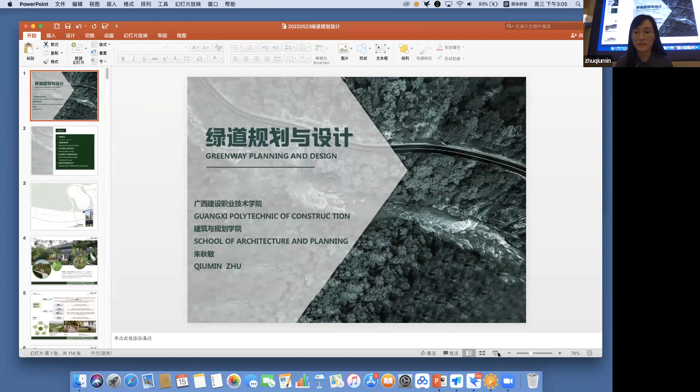Hello, dear ladies and gentlemen. I'm Zhu Qiumin. I'm very engaged in the teaching and scientific research of landscape architecture, and my main courses are urban green space system planning and garden planning and design. The topic of today's course is greenway planning and design.

I will explain the following 5 parts, first of which is the greenway. First, the concept of the greenway, followed by the developments in the history of greenway, then a detailed explanation of greenway planning and design method through 3 cases. First of all, the concept of greenway.

Greenway is a linear green open space, usually around rivers, ridges, scenic roads, and other natural and pedestrian corridors, set up for pedestrians and cyclists to enter the landscape recreation line, connecting major paths, urban green space, natural resources, scenic spots, historical sites, urban and rural residential areas, and large-scale cultural and activity centers.

In short, when you walk in the park, the greenway is at your feet. When you walk around the river, the greenway is at your feet. When you ride your bike down the street to the office, the greenway is under your wheels.

The man-made system includes four parts: slow walking system, traffic connection system, sporting facility system, and signal system. Among them, footpaths, cyclist lanes, and the comprehensive slow system serve the public to carry out daily walks, runs, cycling, as well as sport, recreation, and other activities.

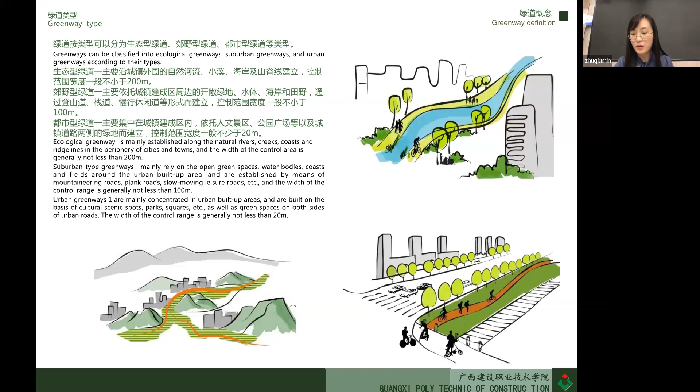Urban greenway refers to built-up areas of the city that rely on the river and the green space on both sides of the road to form a channel for public leisure activities, and its control range is generally no less than 20 meters.

In addition, greenways can be graded according to their level and are generally divided into 3 levels: regional greenway, urban greenway, and community greenway.

Regional greenways connect cities and towns. They have an important impact on the protection of regional ecological green space and the construction of the ecological network system.

Urban greenway may link various types of green open space and important nature and humanities nodes within the administrative area of the city. In actual construction, community greenways are arranged in conjunction with the layout of the urban greenway network.

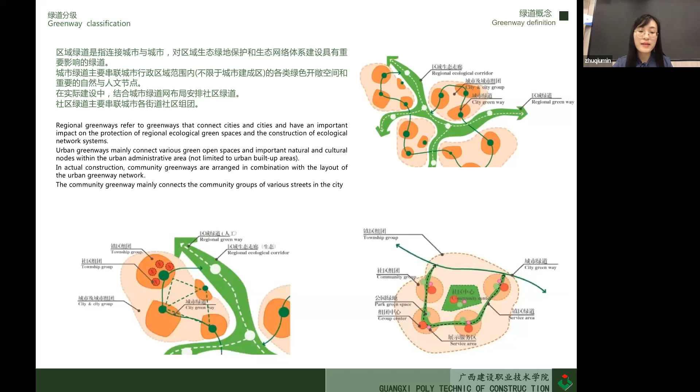Community greenway may ring the city streets and community groups. Next, let's take a look at the evolution of the greenway.

The development of greenway is divided into 4 main stages. The first stage is 1867 to 1960, the early planning stage of the greenway. In this stage, the greenway just began to appear.

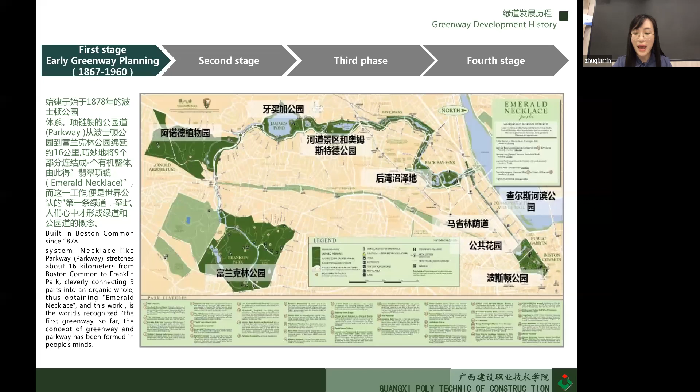It is the Boston Park System's Emerald Necklace, built in 1878. The Emerald Necklace is a parkway that stretches about 16 kilometers from Boston Common to Franklin Park, cleverly linking 9 parts into an organic whole. That's the name Emerald Necklace, and it is recognized as the first greenway. This is how the concepts of greenway and parkway were formed in people's minds.

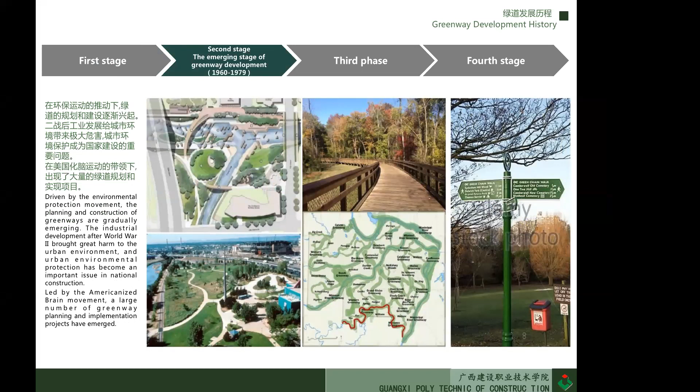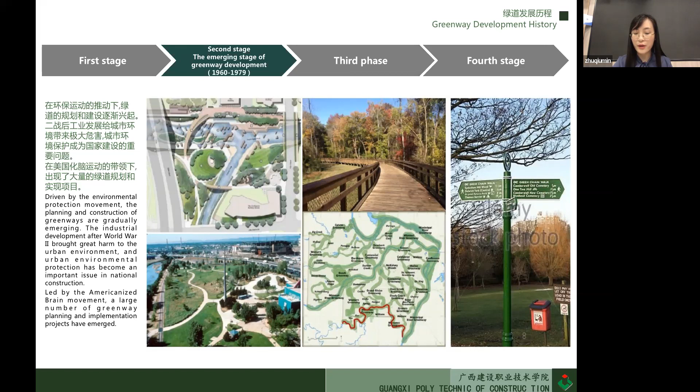The second stage was from 1960 to 1979, which was the emerging greenway development. During this period, the planning and construction of greenway gradually emerged under the impetus of the environmental protection movement. After World War II, industrial development brought harm to the urban environment. Urban environmental protection became an important issue for national construction. Under the leadership of the American Greenway Movement, a large number of greenway projects were planned and implemented.

The third stage is 1980 to 1999, which is the stage of diversified development of greenways. During this period, greenway planning was mainly carried out in developed countries, and the features and functions tended to diversify into a variety of forms of greenway, such as scenic paths, biological corridors, pedestrian paths, and bicycle paths.

Scenic paths are specially designed for the public and tourists to watch and play, while biological corridors are set up for the reproduction of various organisms, which is important to protect biological habitats and provide an environmental basis for protection.

Pedestrian paths and bicycle paths were built to meet the safe passage of human beings. In the current social environment, where people pay more and more attention to healthy living and recreation pursuits, such greenways are particularly important.

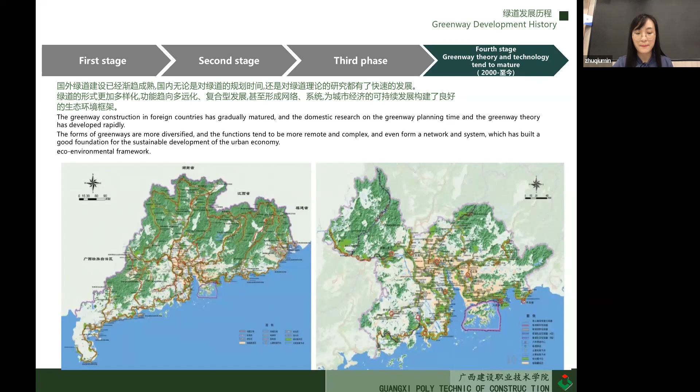In the entire history of greenway planning and construction, there are two distinctive greenways I would like to share with you: the Boston Park system, known as the Emerald Necklace, and the Marina Bay Greenway in Singapore. The first is the Boston Park system, a 16 kilometer system planned and built more than 100 years ago, recognized as the world's first true greenway, linking several city parks together.

Nowadays, this greenway is far away from the hustle and bustle of the city, with its tranquil, idyllic nature, and has become a way of life for Bostonians to walk, talk, and relax on the greenway.

Construction of the entire park system began in 1878 and continued for 16 years, bringing together Boston Common, Public Garden, Commonwealth Avenue Mall, the Riverway, Franklin Park, and other major parks and green space systems, linking together the scenic 16 kilometer park and greenway landscape.

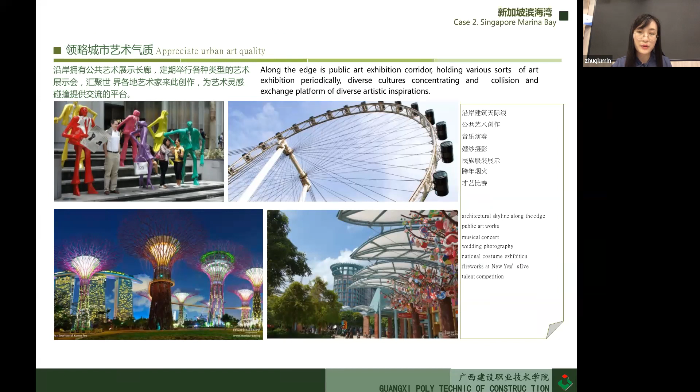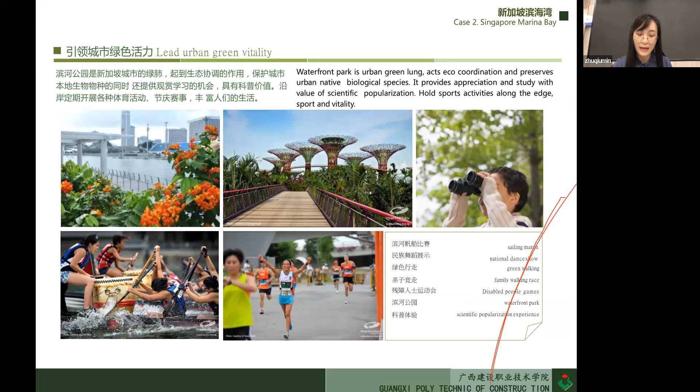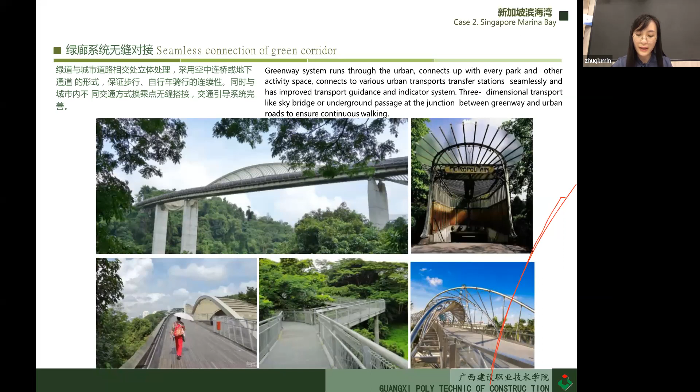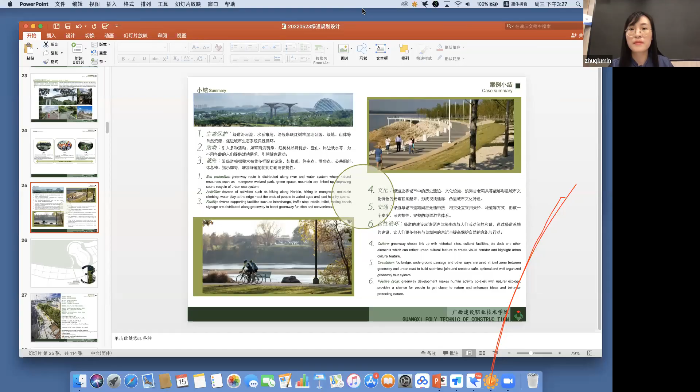Diverse supporting facilities such as interchange, traffic stop, retail, toilets, resting benches. For culture, the Greenway shall link historical sites or cultural facilities, old docks and other elements which can reflect urban cultural features, to create a visual corridor and highlight urban cultural features.

Circulation: footbridges, underground passages, and other ways are used at the junction zone between the Greenway and urban roads to build seamless junctions and create a safe, optional, and well-organized Greenway tour system.

Positive cycle: Greenway development may let human activity coexist with natural ecology, providing a chance for people to get close to nature and enhance ideas and behavior for protecting nature.

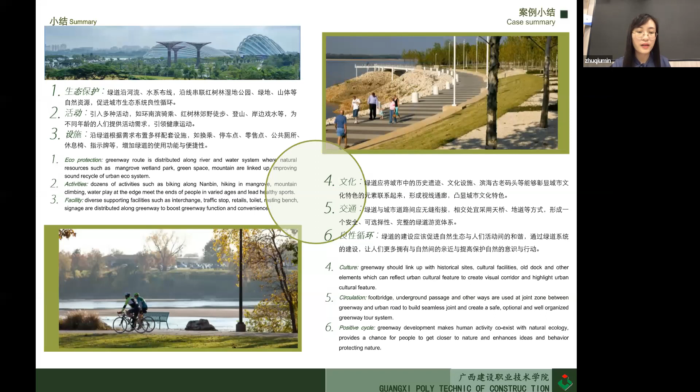Next, I will explain Greenway planning and design, especially through the New York High Line Park. Prior to the construction of the High Line, accidents

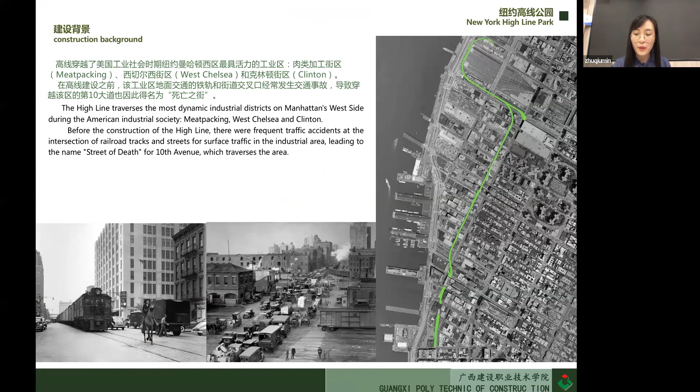occurred at the intersection of the tracks and the street, with surface traffic at grade, leading to the name 'Death Avenue' for 10th Avenue, which runs through the district.

In 1934, with the completion of the elevated railroad tracks, the area was quickly transformed into an industry and freight hub, with former residents moving back and the government beginning to reshape the appearance of the area.

In the 1950s, with the rapid growth of interstate highways and road transportation, train transportation declined, which also affected the capacity of the High Line.

In the 1960s, the southernmost portion of the High Line was destroyed.

In 1980, the High Line ended with the arrival of the last trucks carrying frozen turkeys.

Since then, the High Line has been a subject of controversy over whether to demolish it or not.

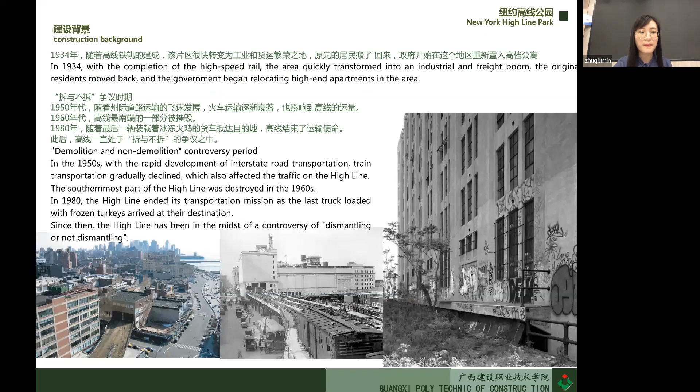This is the introduction, and this is the Gansevoort Plaza. A major access point occupies the corner of Gansevoort and Washington Streets, complemented by the street-level public plaza and the high-level Gansevoort Overlook.

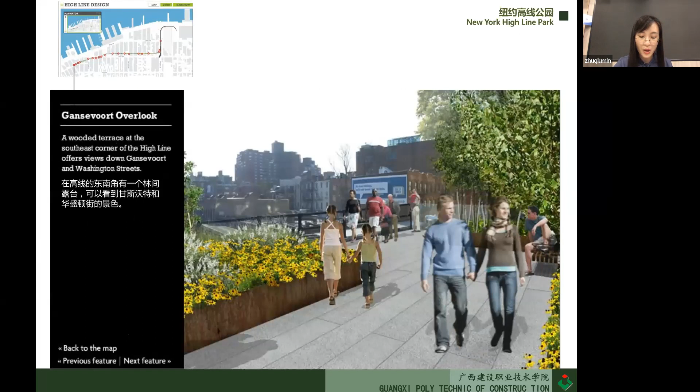This is the Gansevoort Overlook, a wooded terrace at the southeastern corner of the High Line offering views down Gansevoort and Washington Street.

This is the Gansevoort Stair. At the top of the Gansevoort Stair, the Gansevoort Woodland provides dense planting and trees at the edge of the High Line, welcoming visitors into a dark thicket-like setting.

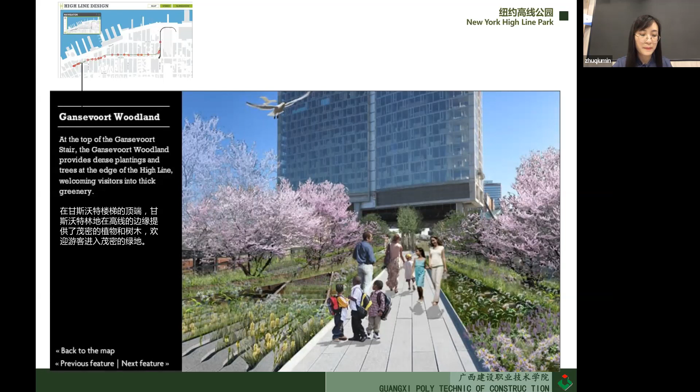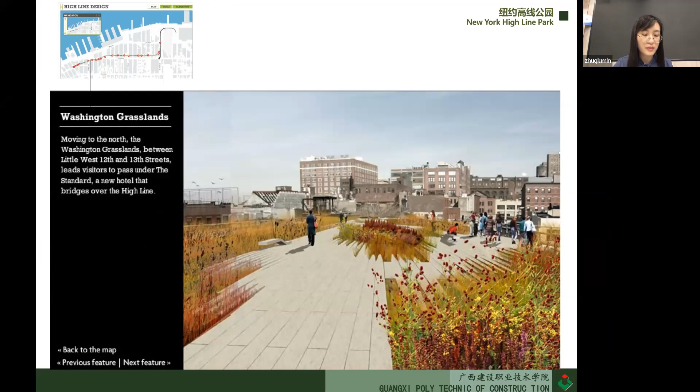This is the Washington Grasslands. Moving to the north, the Washington Grassland lies between Little West 12th and West 13th Street, leading visitors to pass under The Standard, a new hotel that bridges over the High Line.

This is 10th Avenue Square. This is the Chelsea Thicket. This is the 23rd Street entrance. This is the 26th Street Viewing Spur.

This spot recalls the billboards that were once attached to the High Line. Now the vantage point frames views of the city rather than blocking them, showcasing the High Line visitor experience instead of advertisements.

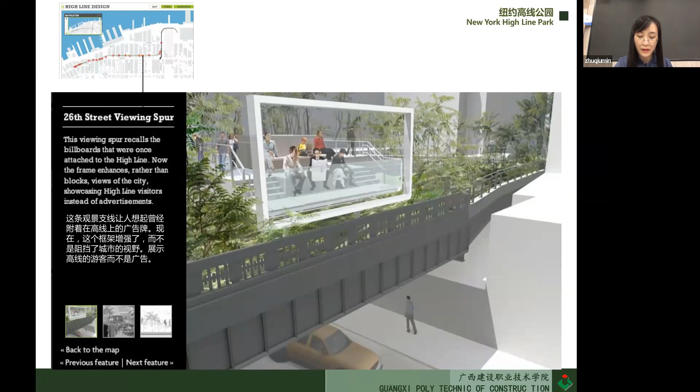But for a few, the simplicity of the straight walkway running alongside the railroad track allows visitors to fully appreciate the green axis of the High Line as it moves through western Chelsea.

The new planting design features a landscape of native species that once grew as a spontaneous flora on the High Line. The High Line's interpretive plantings ensure bloom throughout the growing seasons.

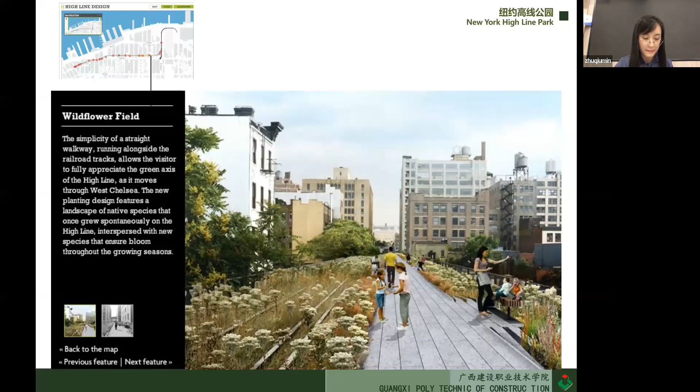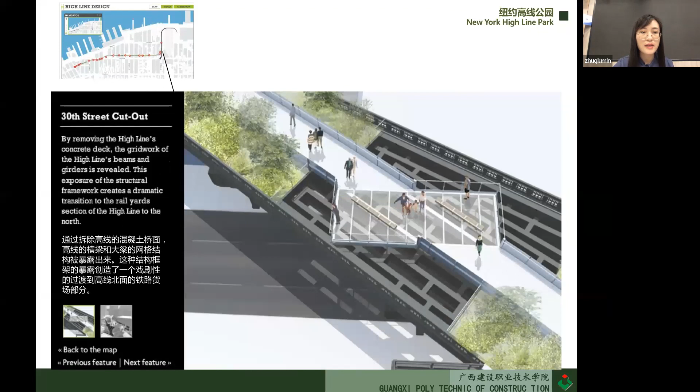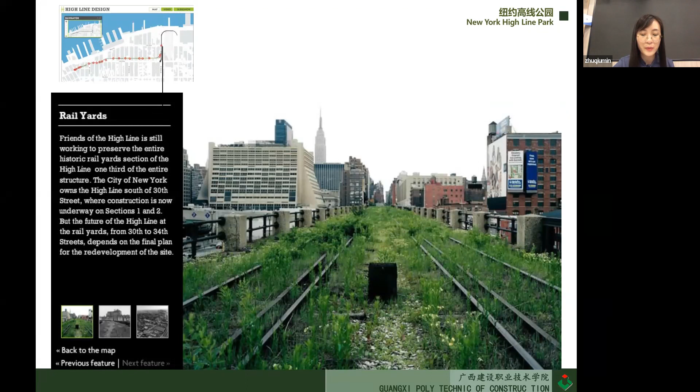This is the 30th Street entrance. This is the 30th Street cutout. The designers carefully selected grasses and trees to create a native landscape space. These plants build on the existing landscape and grow under specially curated environmental conditions.

This linear path is not very wide, with the width on both sides only 9 meters. The purpose of this facility is to allow visitors to rest and take in the view.

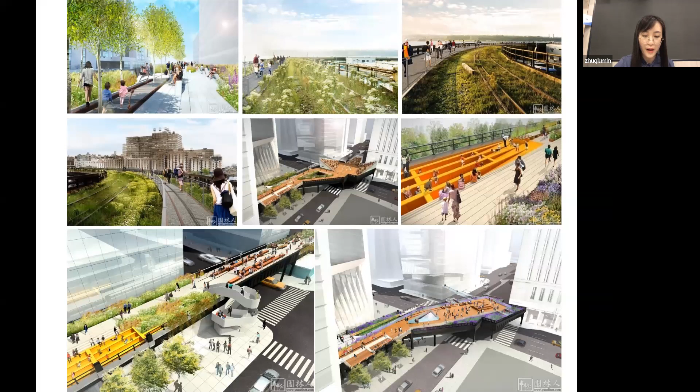Chelsea Thicket: native plants are used here, and this is also the transition zone between Section One and Section Two.

Bridge: a section of the railroad was removed from the original High Line platform and replaced with a metal bridge 8 feet above the highway that gives a more expansive view.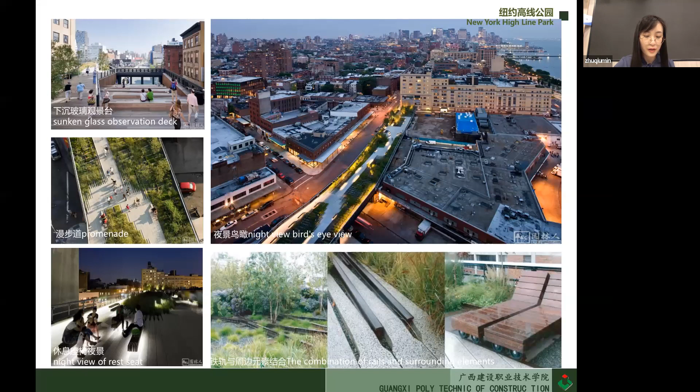This is the sunken glass observation deck. The original rail line surface was also taken out and a more commercial viewing space was installed. So the picture shown is the sunken glass observation deck.

Next, we will take a close look at the New York High Line park by watching a video shot on location.

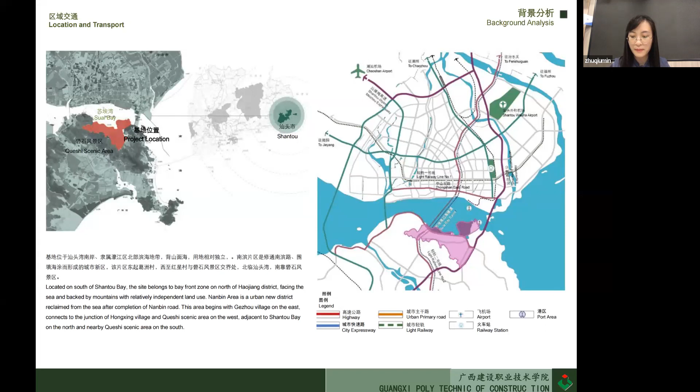Firstly, Shantou is a coastal city, the element of the sea, all rivers run into the sea, compatible as a hometown for overseas Chinese. Secondly, Shantou is a city because of its harbor, an important node on the Silk Road. In addition, Shantou is a Chaoshan city, good at business, with characteristic city image including Chaozhou reading house, Chaozhou opera, Chaozhou drums, Chaozhou folk songs, and Kung Fu Tea. Therefore, three key words can be extracted for Shantou: sea, port, and tide.

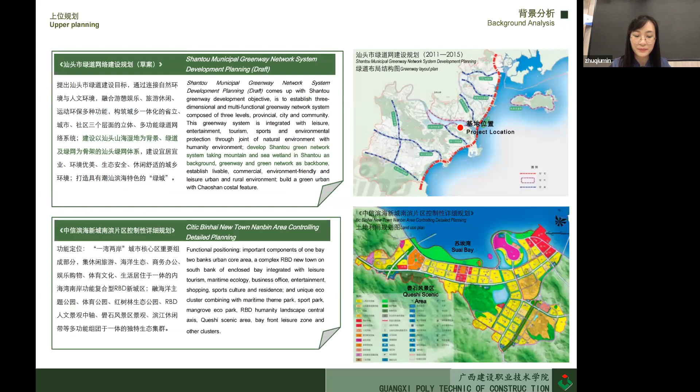Next, we need to carefully interpret the planning. The most important planning in the Shantou City Greenway network construction planning proposes, in concept, to link the mountains with the sea, connecting green trunk roads with penetration and greenness around the city.

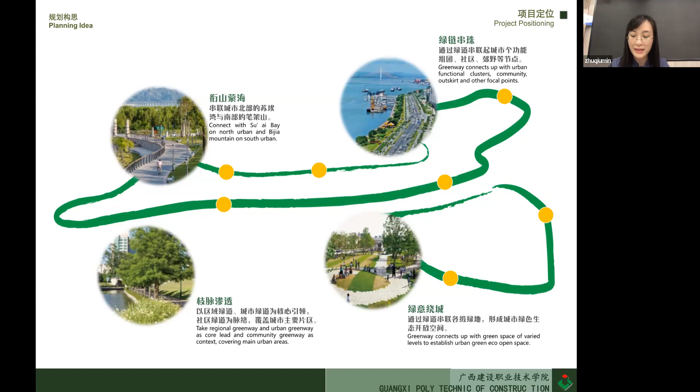Primary corridors preserve urban eco-safety. Here, one path for families. Here, a romantic route. Here, an urban space for art. Here, an exhibition room for culture. Here, a road to eco-health.

So the objective per position: the objective of the whole greenway planning and design is to create a modern coastal urban greenway model, a leisure landmark of East Guangdong, and an urban greenway tourism business hub. The main themes of the greenway planning include ecological experience, healthy life, arts and human needs, tourism and leisure.

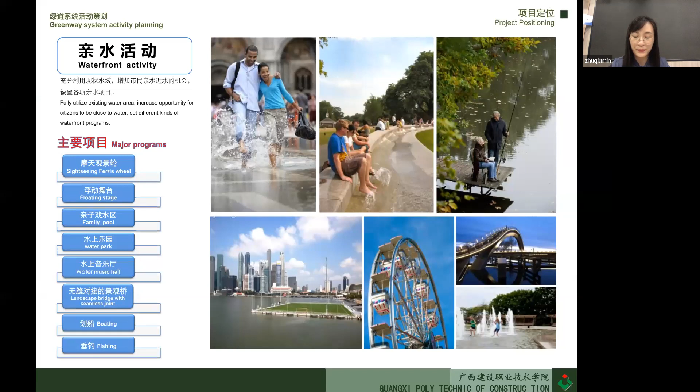The second is children's activities, to provide a place for children and youngsters to grow up. The main projects are children's pool, children's farm painting, children's garden, trampoline, rock climbing, children's games, sand play, and kids driving.

The third is culture and artistic activities, deep excavation of local culture and Chaoshan culture, with good protection, inheritance, and promotion. The main projects are open air series, arc stage, listening to Chaozhou opera, tasting Kung Fu Tea, festival celebrations, stone carving displays, photography, and painting.

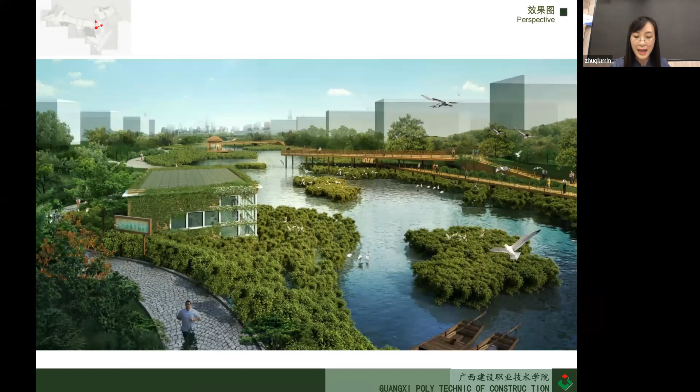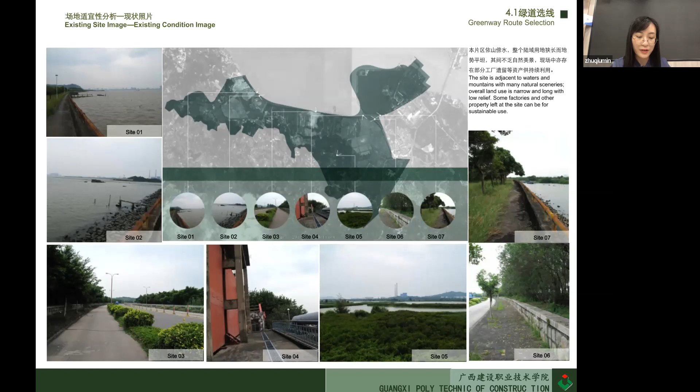In the greenway selection principle and criteria, one should choose implementation sites along the sea and main public facilities, making use of existing landscape resources. Select implementable sites, selecting green areas identified in the control plans and raw green spaces as space for greenway implementation.

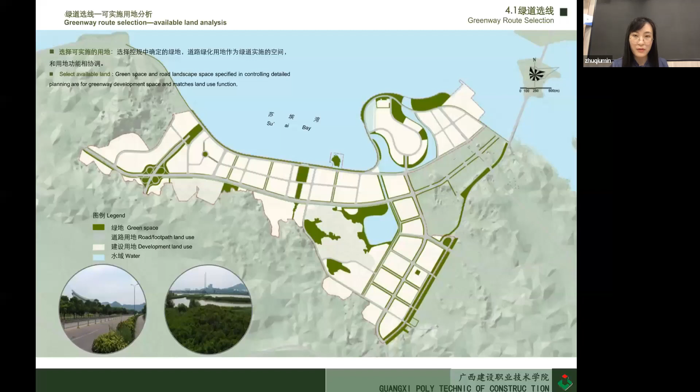Route selection conditions: first, suitable routes, including open space, existing greenways, circulation routes, and public green space. Second, public service facilities, including transportation nodes, urban and residential service facilities. Third, core landscape resources, including nature background, humanist nodes, characteristic urban landscape, and urban public space.

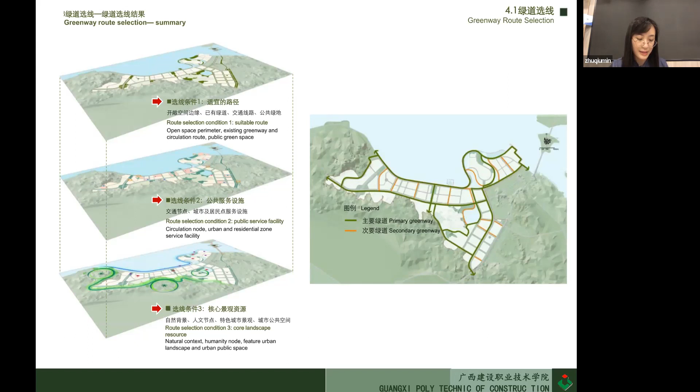Different sections will distinguish the type of greenway according to the characteristics of the surrounding environment and the needs of the public, mainly including the harbor water-friendly greenway, mountain touring greenway, countryside green nature greenway, urban humanist greenway, and wetland ecological greenway.

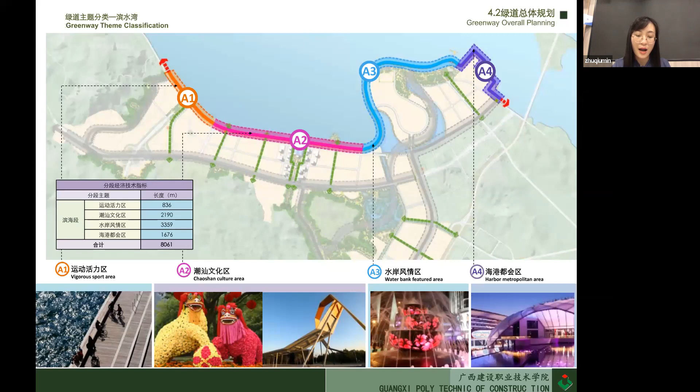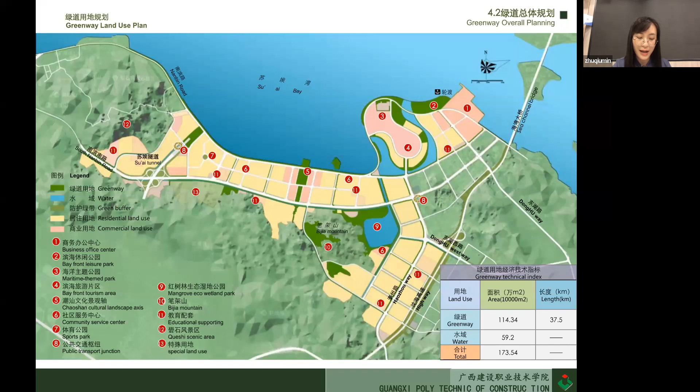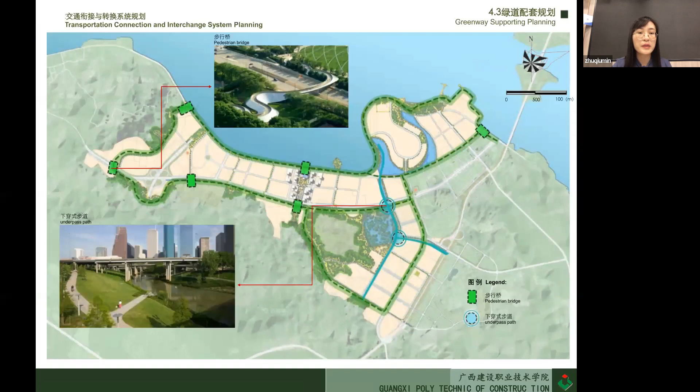This is the traffic transportation. This is transportation. Slow transportation.

Greenway night lighting system planning: the night lighting facilities are laid out according to the sub-scene. The coastal section chooses designs that highlight the living atmosphere, while the community light is warm and soft, creating a sense of warmth. Lights are set around the river bank, road edge, and waterfront platforms to ensure safety. The light posts should be beautifully shaped with artistic style, reflecting the cultural connotation of Shantou.

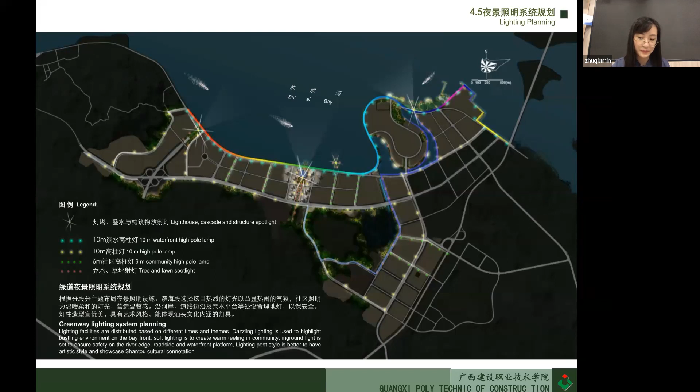Under vertical system planning and design, in order to create a good greenway environment and improve the visual quality of the landscape, the vertical elevation of the Nanbin Road is controlled at 4.2 meters. At the same time, the countryside change of level and the drainage direction of Shantou is planned from north to south, with the purpose being to discharge into the bay to the north after collection of the flow canal.

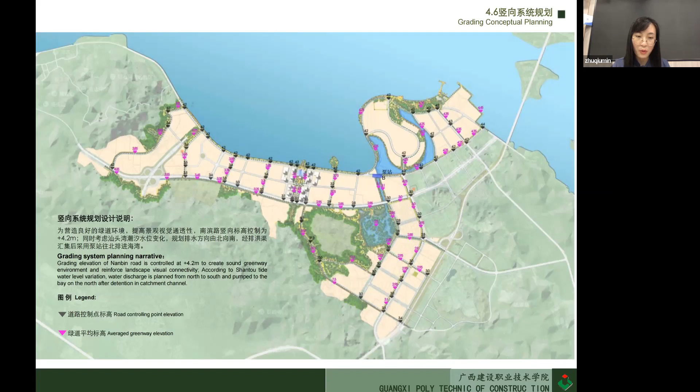Next, we will learn specially about the principle and variety type of greenway design, how they are constructed and the materials used. First of all, water-front recreation greenway.

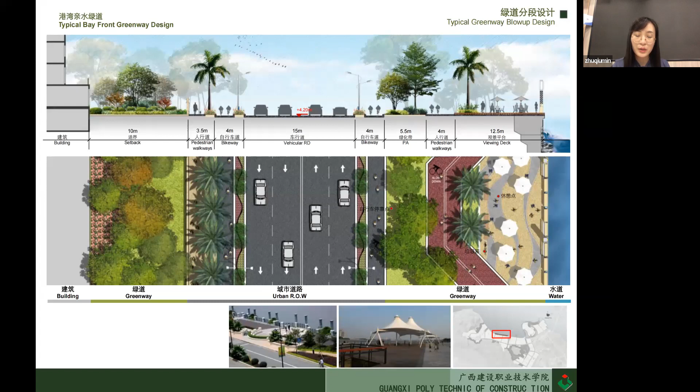The construction of the waterfront leisure type greenway should be combined with the blue line planning of the river water system, using the advanced landscape condition on both sides of the river, relying on the river and other linear space for an ecological type of channel, showing the characteristic landscape scenery.

The construction method uses the river embankment and its internal and external sides to build greenway. Theoretically using the river bank as a greenway, the excess flow area on both sides, due to flow control requirements, cannot have trees planted, limiting the river bank's road shape.

Greenery is based on the original ecology, ensuring trees and planning on both sides of the slope move as needed.

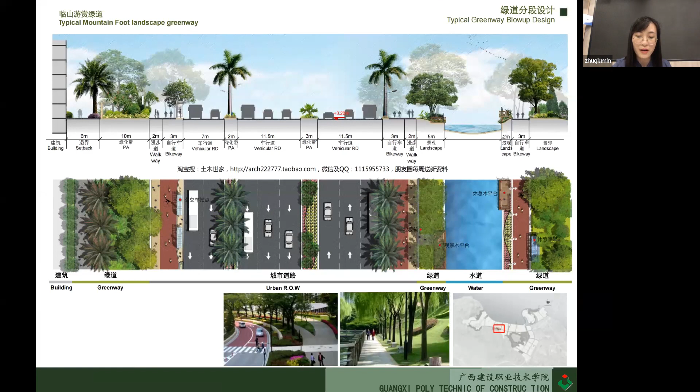Next, the mountain and forest recreation type greenway. Design principle: the mountain and forest recreation type greenway should be combined with characteristic landscape, traffic paths, and nature for construction, so that greenway users can enjoy a better natural landscape.

Construction method, transformation type: use existing roads such as roads and hiking trails in mountain and forest areas to transform them into greenway. New construction combines the local conditions with various rivers and streams into the mountains and forest, using wooden poles or cement bricks to support trestle bridges, creating an ecological landscape greenway at a relative scale, providing tourists with convenient cross-access paths, ideal view spaces, and more integration with nature.

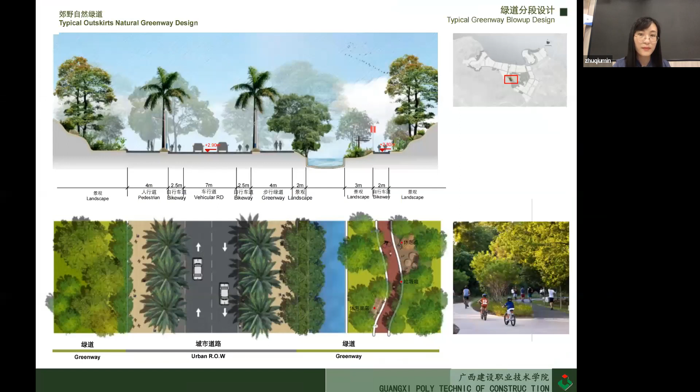Next is the third stage, the urban ecological greenway. Design principle: urban ecological greenway is mainly constructed by relying on large ecological parks, green areas, and ecological corridors in urban areas to provide residents close access to green natural environments for physical activity.

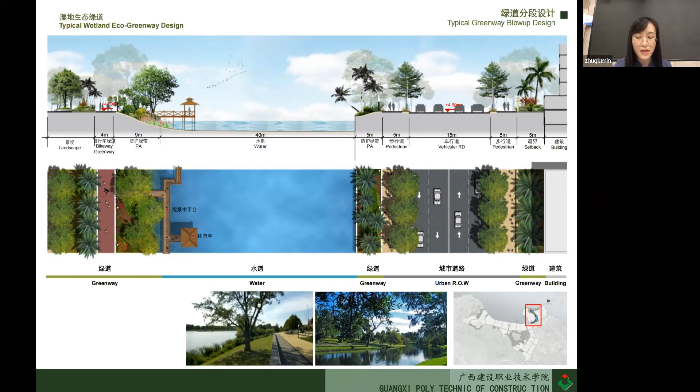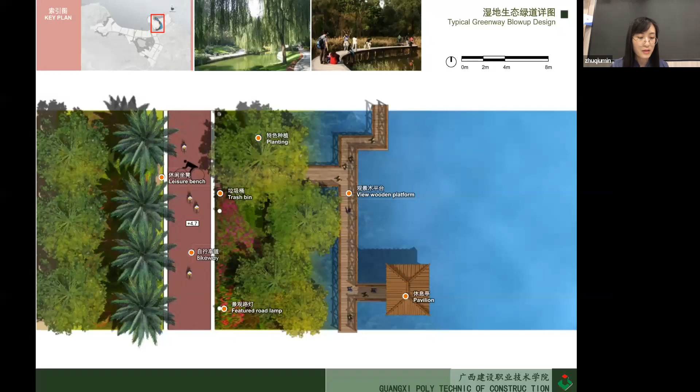Construction method: transform the access road into a slow walkway and greenway, paving with materials matching the surrounding green landscape conditions.

Next is the urban humanist style greenway. Greenway selection links combined with the city and important leisure recreation space arrangements to meet residents' use of urban public space, relying on existing urban roads and greening on both sides through adjustment of the road cross section, combined with road greening and other ways to divide the greenway space.

This doesn't affect the operation of the existing traffic system. Around the city river layout, the greenway section setting should take into consideration the river and surrounding pedestrian space, and protect water recreation safety.

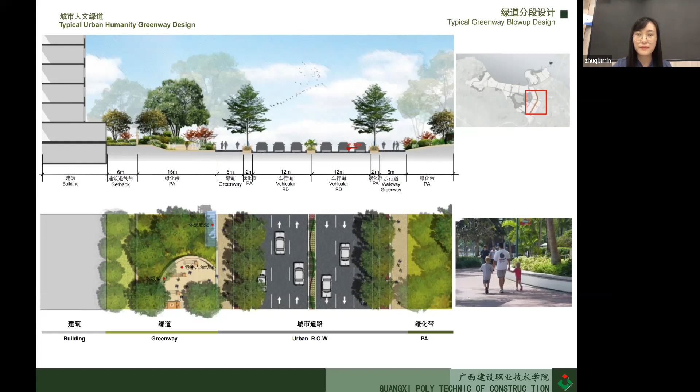Cross sections for the slow walking system include comprehensive slow walking ways, biking paths, and walking paths. The urban style greenway slow walkway mainly adopts the form of comprehensive slow walkway and walking paths.

Next, let's look at three cases: Chengdu Tianfu Greenway planning and design.

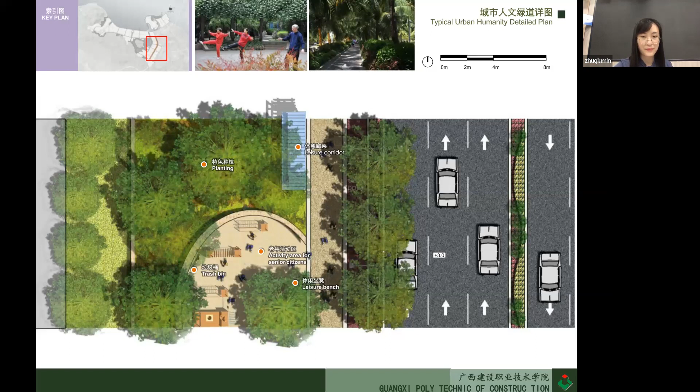This is good weather for riding a bike.

Hi everyone, I'm Joe, from Oxford, England, and cycling is my passion. Now I'm in Chengdu, China, and I've been living here for more than 3 years. How about the cycling environment in this city? Today I'm going to do a challenge to draw a circle around the whole of Chengdu, because they recently opened a greenway which, at 100 kilometers, is the longest greenway in all of China.

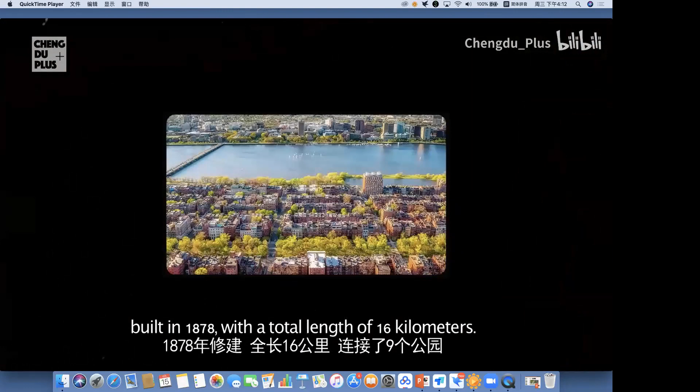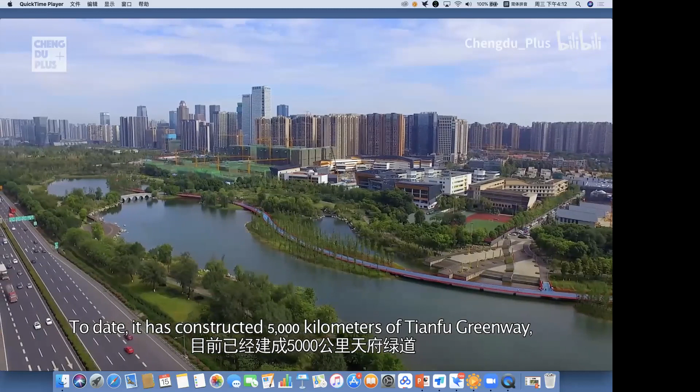The world's first urban greenway was Boston's Emerald Necklace, built in 1878 with a total length of 16 kilometers. It connected a total of 9 city parks. But now, Chengdu is conducting an even larger social experiment. It aims to build a park city. To date, it has constructed 5,000 kilometers of Tianfu Greenway, weaving its way through the urban environment.

In order to help you understand how Chengdu is creating a bike-friendly city, I'm here with Bai Xi, the designer of this bridge. Hello, Bai Xi. Nice to meet you.

Bai Xi, born in the 1980s, is one of the designers of Tianfu Greenway. The greenway is his own canvas, on which every garden, every bridge, and every bookstore is full of innovative design.

I also studied at Nottingham University. Oh really, in the UK? Yeah. Oh, I'm from there. Oh cool, really? Yeah, I have traveled to a lot of countries, including the UK and Copenhagen. So what do you think is the difference between UK parks and Chinese parks here? Parks and greenways in England are sometimes very beautiful, but they're not as big. I think in Chengdu, and in China, it's a huge system. It feels like many big cities are connected by the greenways.

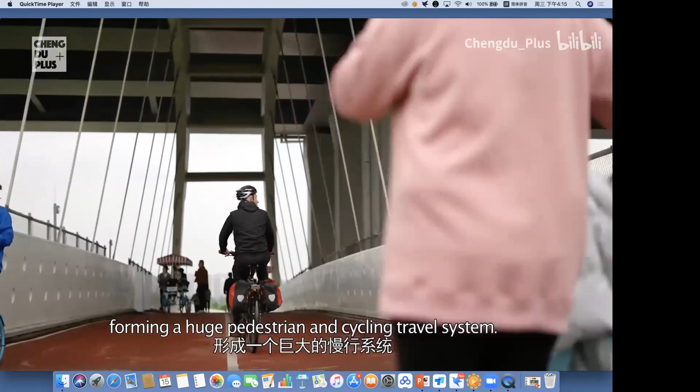Just off the greenway, this is one of the transfer points to the public transportation system. I think this is one of the reasons many people in Chengdu like to use share bikes, because when they come here and exercise, they get very, very tired. But then they can go up here and easily get home.

This here is the BRT line, and it just takes 25 minutes to go all the way to Chunxilu. It's very convenient and very good. As you can see in Chengdu, the conditions for riding bicycles are really good.

But a lot of people don't actually own bicycles. That's why shared bikes are very popular, because riding your bike to work or to go to the supermarket isn't a way of showing off what you have. It's actually a way of life.

I found something a little bit strange, a little bit unusual. This is a place where you can rent bikes for the day. This is not usual in Chengdu.